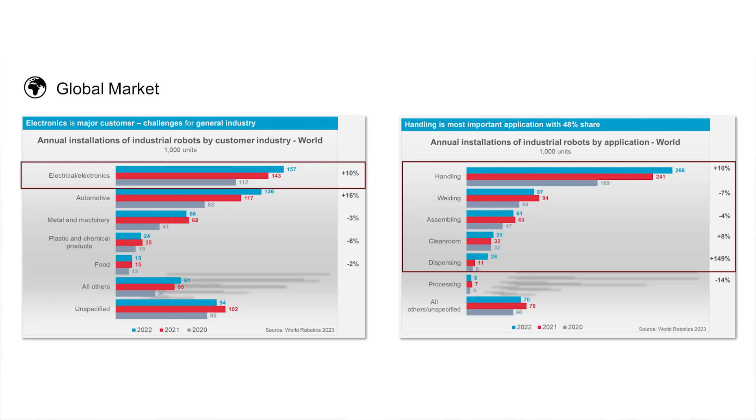Instead, in Europe, we have a very strong know-how, and often the production is related to custom electronic board or some special components. Let's say that for robotic is a very important market because according with our studies and the International Federation of Robotics, electronic market is one of the top two sectors for robot deployment alongside automotive market. This is very significant for Europe, as you said.

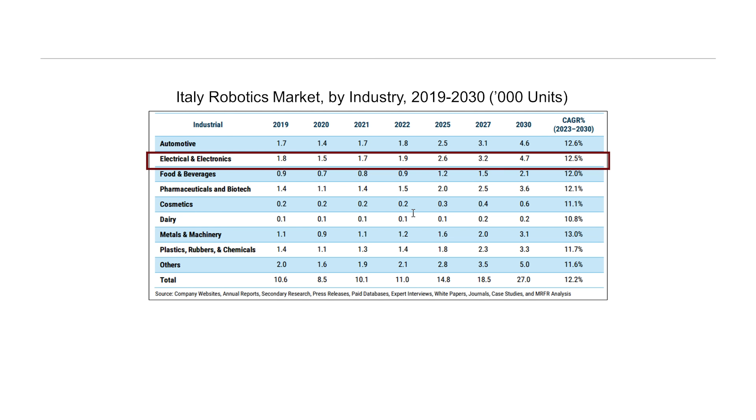So could you outline why these changes are happening right now? Yes, we can consider different factors, different drivers why this is happening. For sure, a COVID pandemic accelerated this process because it showed the vulnerability, the problems to have a distant supply chain, because a lot of electronic suppliers were located in Asia. So the shortage of semiconductor impacted all the rest of the world, bringing to a reevaluation of the supply chain strategy.

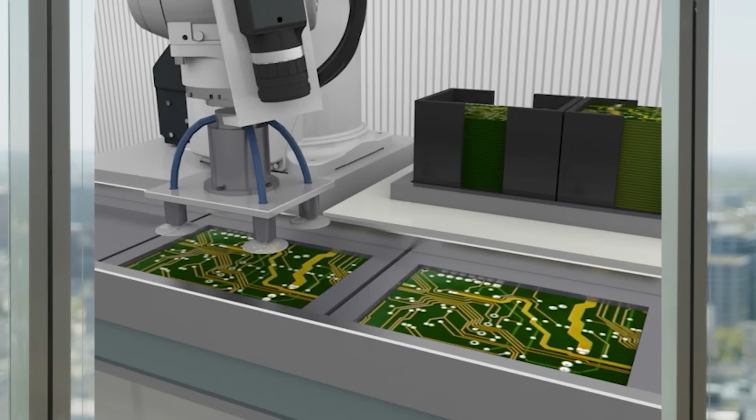But it's not the only driver, even because before we spoke about automotive market, and automotive is shifting to electric vehicles. So this will increase the demand for electronic boards and other circuits in general, semiconductor components for electronic market, for automotive market, sorry.

Sure. And another driver we can rank between these is the government fund. There were huge investments at European level, and the European Chips Act is a clear example. But also at the national level, we have different investments that can support companies to automatize their production and be more competitive worldwide.

So it sounds like this will translate into significant growth of this market in Europe. How do you see this? How do you expect the market to grow in the coming years?

In the coming years, let's say that I see different changes. Until now, automation was related mainly to big companies. Now we are observing that also small and medium enterprises are approaching robotics and automation. So I think that this change of paradigm will be very soon reality.

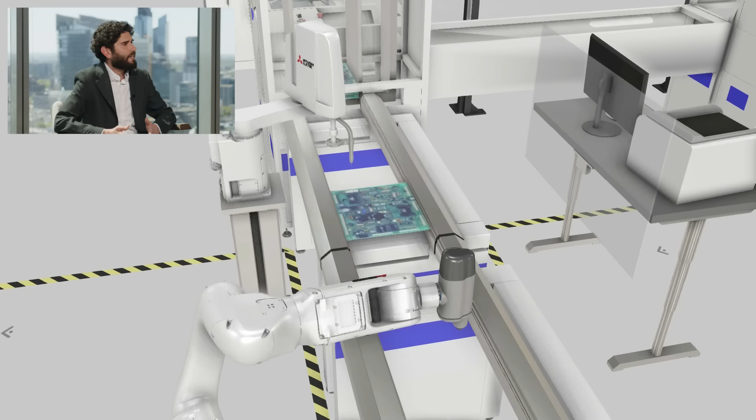We can say that the biggest challenge is for sure the shortage of skilled workers, even because in this period a lot of experienced workers are retiring and not enough young workers are entering the market. For example, soldering is a very critical application in electronics because this process needs a lot of experience and an extensive training.

So, companies in the electronic market right now are struggling with this. Another challenge they are facing is volume, because mass production is mainly related to Asia. In Europe we have production characterized by low volume and high product mix, which means companies need flexible solutions and equipment adaptable to different formats and changes. When we speak about small and medium-sized enterprises, they face budget problems because they don't have a huge budget to automate their production. Last but not least, there is also a lack of knowledge, because over the years all the knowledge was developed in Asia, and here our know-how is limited to some specific components. So for this reason, we try with small and medium enterprises to share the knowledge we developed in Japan and across Asia.

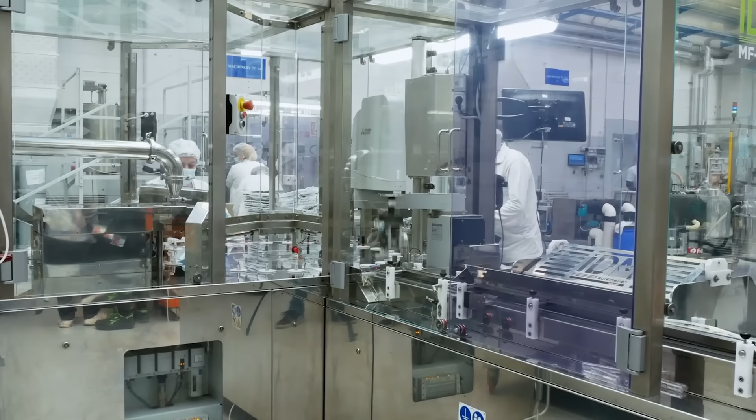So how do robotic solutions fit specifically into electronic market needs? In general, robotics brings speed, so faster cycles, brings precision, so repeatable activity, and flexibility. They bring flexibility to your equipment.

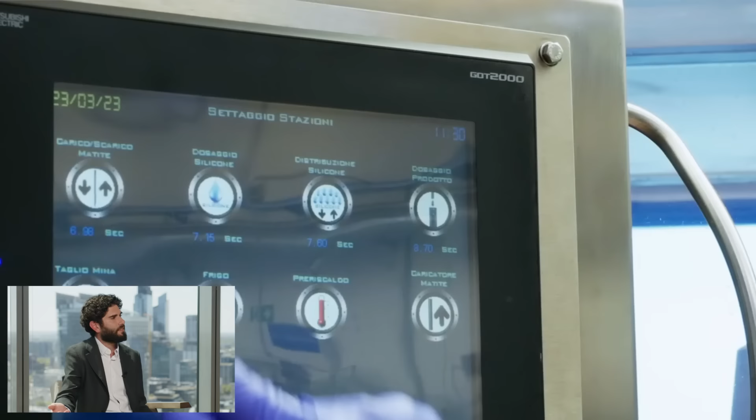Specifically for the electronic market, we need to start from the requirements, from the risk. One of the biggest risks in electronic activities is electrostatic discharge. This is the reason why we perform modifications of our standard robot to develop a tailored solution for the electronic market, with a certification called ESD. Our robots are ESD compliant, certified by an international certifying body called ESD Academy.

In comparison with our standard model, the ESD model has special paints to avoid any discharge, or rubber caps that eliminate completely the risk of electrostatic discharge, eliminating the risk of damaging the electronic board or semiconductor components.

In addition, a lot of activities in the electronic market are performed in controlled areas, because contamination from dust or other particles can damage the electronic board. For this reason, we certify our robot as standard with ISO class certification, given by Fraunhofer, another international certifying body. This allows our robot to work in controlled areas, as many activities occur for the electronic market.

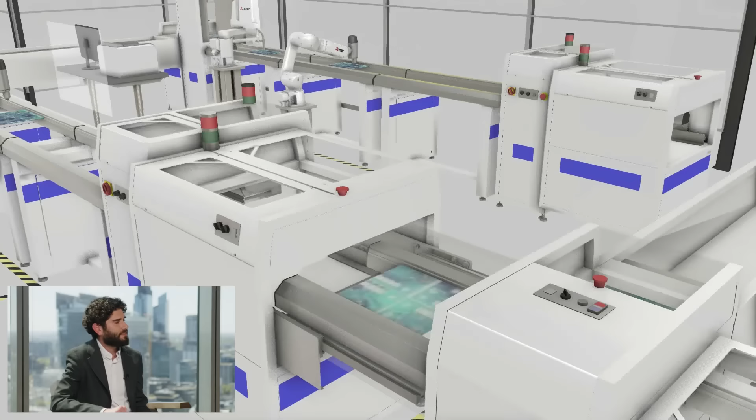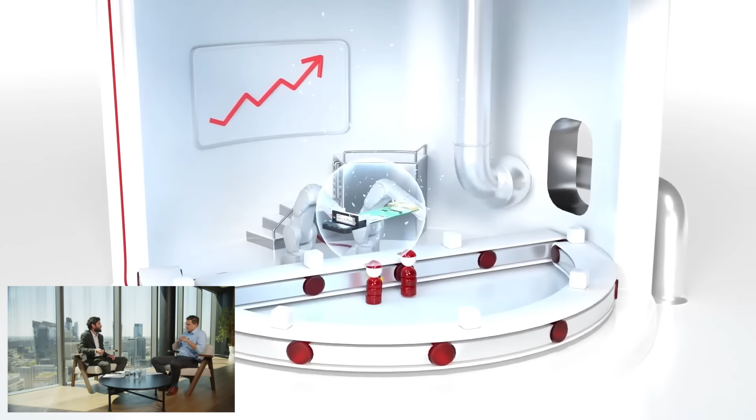Yes, you mention a key point for electronic activities, because precision is required for many processes in electronics. Our factory spent a lot of time studying this problem, and at the end they developed a dedicated function that increases the repeatability of our robots. You can easily enable this function by adding external hardware directly to the controller, and the robot will be more precise independently from temperature changes.

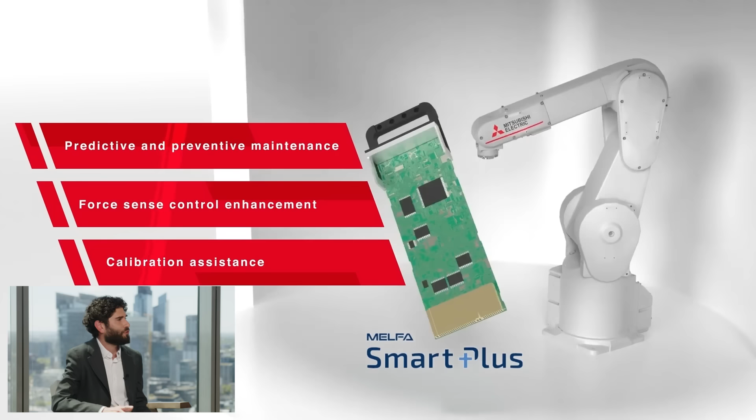In addition, all this production and precision data from testing - because precision is often used not only in assembly but also in quality checks to see the exact position - all this data is saved into our IQ platform, our automation platform, because we have a model fully integrated with our PLC. Thanks to this, we can collect all the data and share it with a dedicated protocol in the semiconductor market. This protocol is called SECS/GEM, and thanks to this complete ecosystem we can collect all the process data and share it with all the other systems.

It's important to note one point about how you actually assemble the product, but also how you report that precision further. So I think that's a good point.

So we have this picture now where the challenges in the manufacturing of electronics assembly are met with advanced robotic solutions. And I think it's worthwhile to also mention that the one thing is the precision of the robot arm, but the second one is this kind of intelligence-enabled precision given by these special features that you mentioned. So all of that, from the pure production perspective, sounds great.

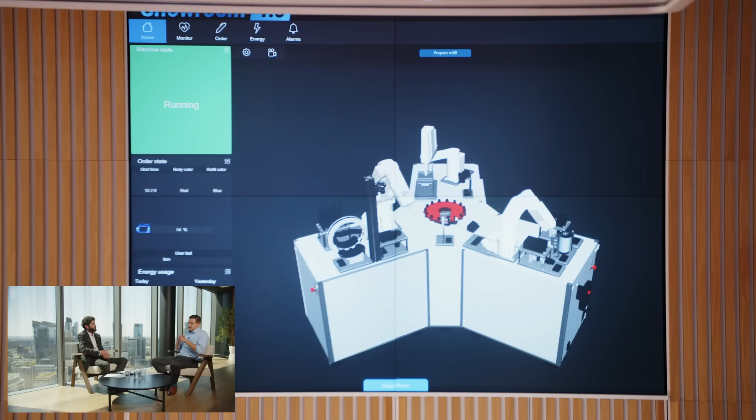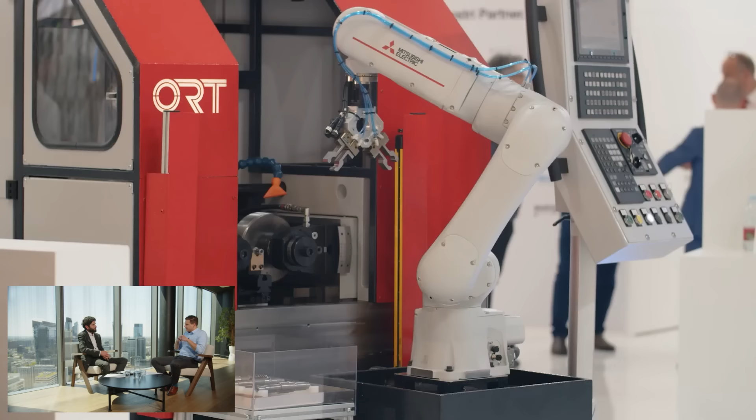However, what about the effort of implementation of robotics solutions? And I think this is when the software value comes to mind, right? So the problem that we still have in front of us is the implementation of the robotic solutions. There is a lot of discussion how, for example, digital twins are simplifying the approach to design and deployment of various applications. And I assume that also fits robotics. So how do you see digital twins helping manufacturing companies to use the robotic applications?

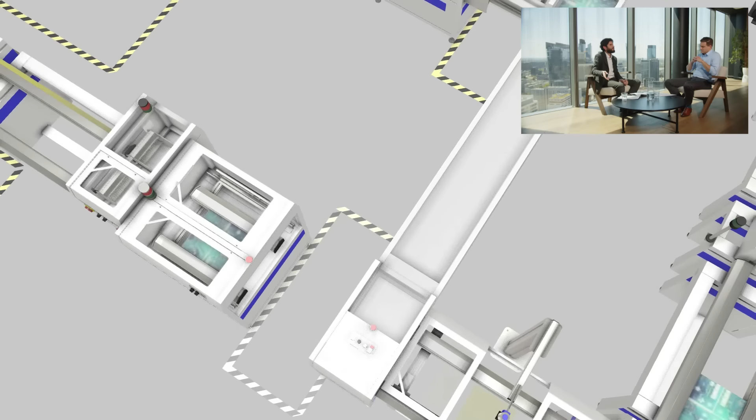Digital twin is strongly impacting robotics, it is a game changer, because digital twin allows us to design the machine, validate and program the machine before a single piece of hardware is mounted or constructed. So for all the companies that struggle with budget problems, that find it very difficult to integrate robotics in their manufacturing, we support them thanks to digital twin, and this creates a real bridge between the virtual dimension and the physical dimension. And this represents a booster for automation for all the companies that before were not so prone to approach automation.

Yes, because you can understand a lot about a specific application just by looking at the digital representation. I think that definitely changes the approach to planning and decision making for automation investments. Yeah, and for the company who wants to approach automation and robotics, it allows the company to see that their idea works in their production environment. So this makes the difference when someone looks virtually at exactly their production environment and their concept working on it. So this for sure is something that brings value.

Right. When we are talking about how this digital twin approach helps in creating those kinds of applications, maybe we should focus on specific types of applications. So I assume there are certain types of robotic applications that can be deployed in electronic manufacturing. So maybe you could outline what these typical types of applications are and how digital twin is supporting the creation of those.

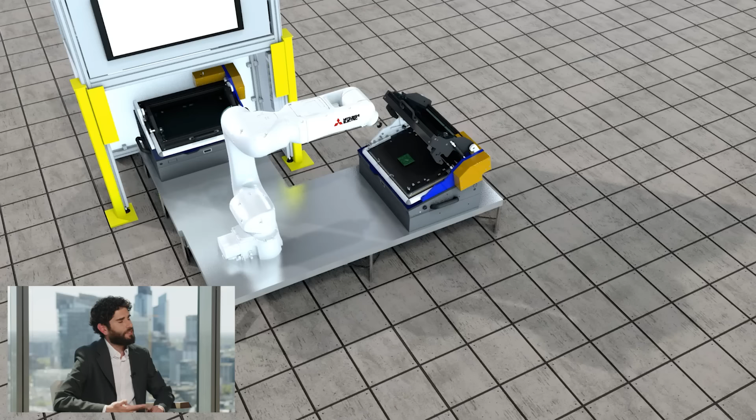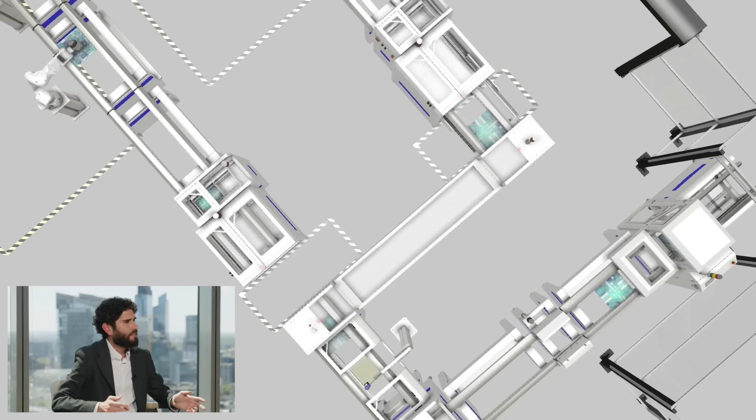Yes, of course. Three typical applications we see every day with our customers are, for sure, loading and unloading of the electronic board, so machine tending for electronic boards. And this typically happens with the test machine. Typically the robot loads the electronic board into the probes on the fixture machine and then unloads the electronic board when the test is completed. In this case Gemini was fundamental, because in the last project we made, one single robot was loading and unloading with two different test machines. So the calculation of the cycle time was very important to understand how the robot cycle can be developed. So in this case, the impact of the digital twin was fundamental.

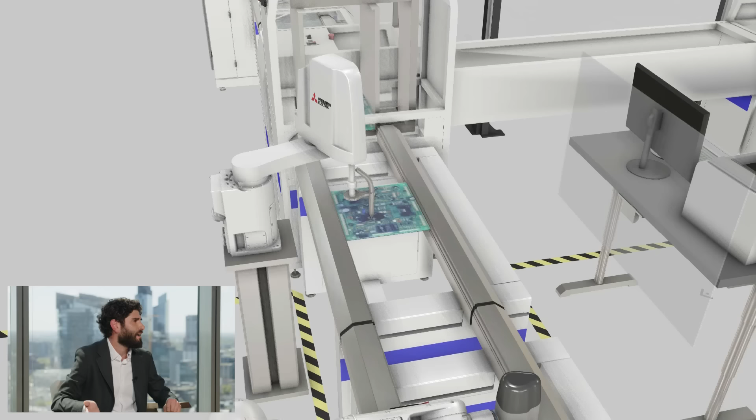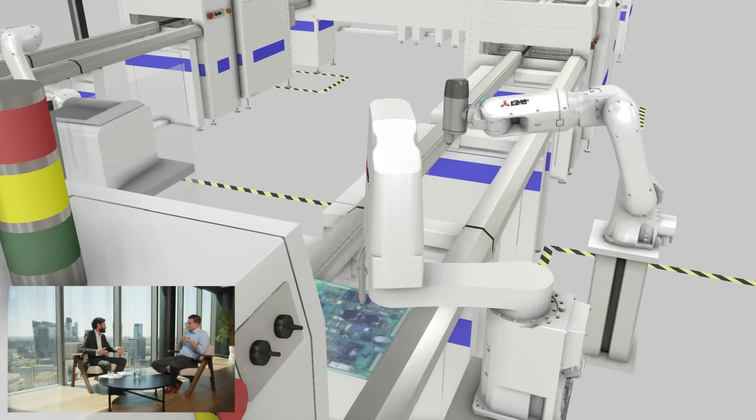Another application we already mentioned is soldering. In soldering, the difficulties can be related also to the path of the robot. In this case, the integration between our software for programming robots and the virtual commissioning software, Gemini, was very important, because thanks to functionalities of our robot programming software, we easily make a complex path and then replicate it, just because they are integrated. So what I program in RT Toolbox, we can visualize on Gemini. Okay. So the programming was very easy from a robotic point of view because we had a dedicated function, and then you can visualize the soldering activity on Gemini. Mm-hmm. And the last application that is very important is quality inspection.

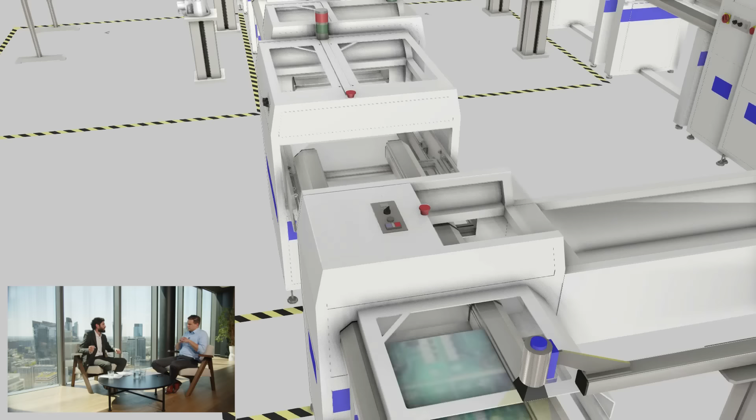And in this, typically the robot integrates a camera on the wrist, or the camera is positioned in a fixed position. So we can say that to define the best layout of the application, the key was Gemini, because we tried the two scenarios, with a fixed camera and with the camera integrated on the wrist of the robot, and we saw which was the more flexible solution to satisfy the needs of the customer.

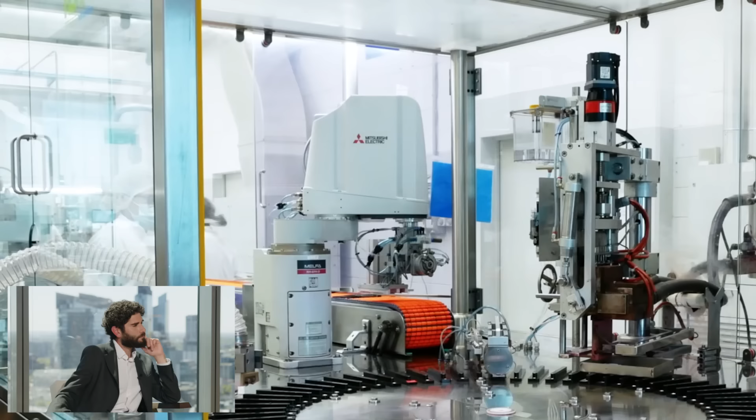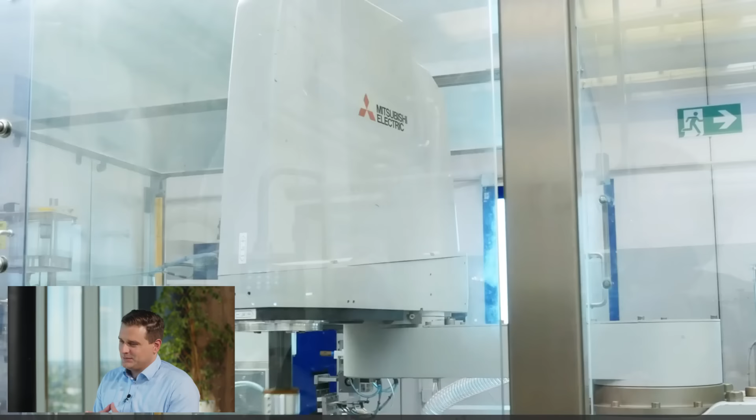Right. And I think it's a very interesting summary of those benefits based on specific examples, because there is a variety of problems to be solved with robotic applications, and I think that the key is to be able to do that by trial, but a trial that is cheap and doesn't cost mistakes and hardware investments and so on. So I think that for those processes in manufacturing, digital twin is crucial.

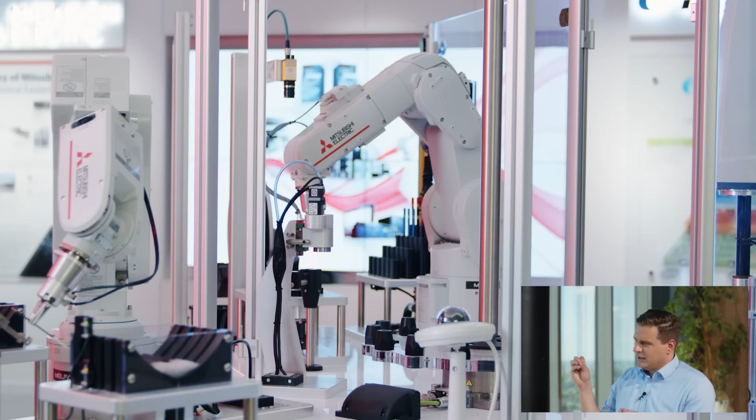I think we can also say that the benefits of digital twin don't end with, let's say, application development, right? So you mentioned how the program written for the robot can then be visualized in the digital twin in Gemini. But the same is true when you actually have the application already running, right? So with digital twin, you can monitor the actual production and also start thinking about improvements. So the digital twin probably gives you benefits through the whole life cycle of the application. Would you agree? Yes, totally.

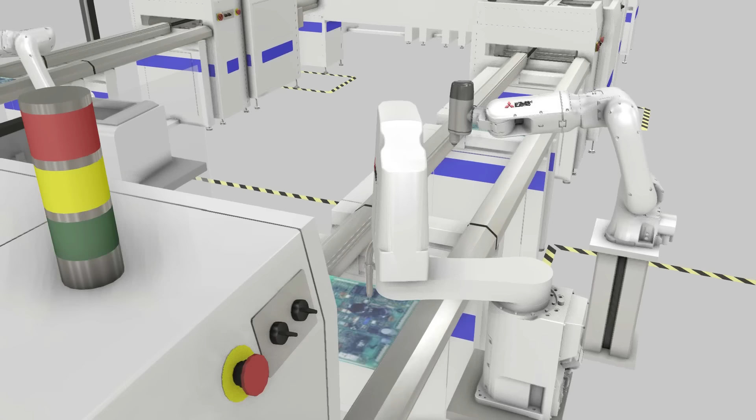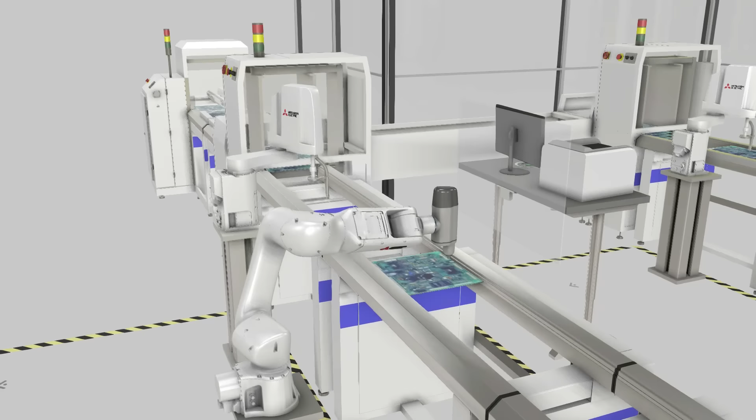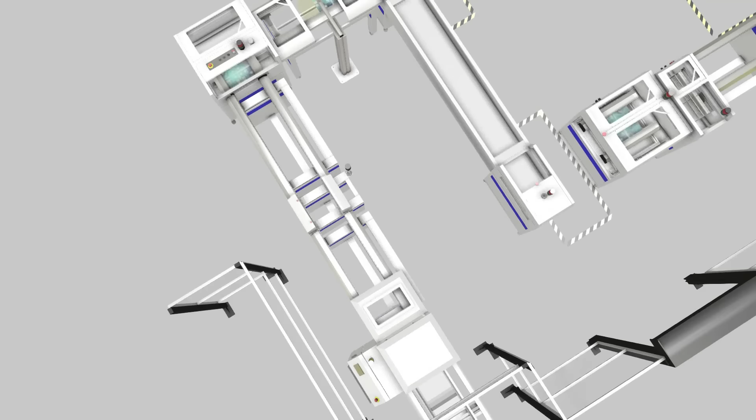I totally agree, because when you have a machine already running, you can import the CAD of the machine and all the parameters into the digital twin software, and then simulate all the different scenarios. So, for example, I change a parameter or add a robot or change the layout of the machine. That is everything that you can do. Evaluate this scenario and then see the impact in terms of takt time, in terms of productivity, in general of OEE. So it allows you to determine which is the best scenario to improve the productivity of your machine. So exactly.

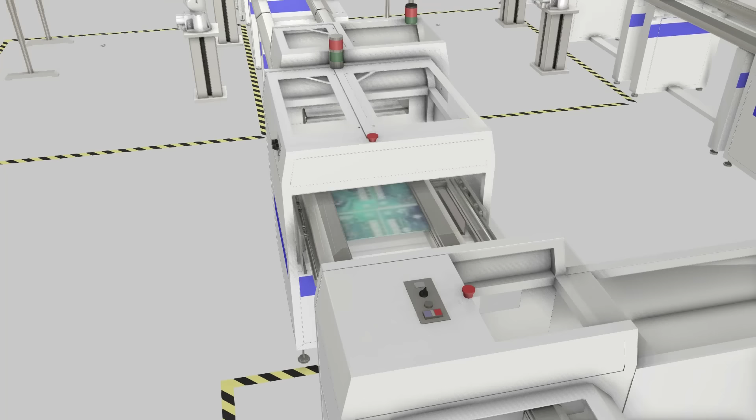Right. Yes, because I think once you make the investment in the software package, like we mentioned, then of course the value of that tool will be provided through time and through the actual process of manufacturing. And I think, with high mix, low volume production, those changes in the layout, some tweaks in how the robot works might be quite common. Yeah? Yes, it happens very often, also because custom boards, for example, are very common in Europe. So changeovers are very frequent, and different scenarios are always present.

Yes, right. Great. I think that this gives us a very good understanding not only of how to create this type of application in the electronics market, but it also presents the value of the software solution that I mentioned in the beginning. So robots themselves are very important to address the labor shortage, right? Due to their precision and all the certifications you mentioned, they are important for electronics assembly and other types of processes in the factory.

But what they can do is definitely augmented by the digital twin that you mentioned, because the digital twin reduces the costs of implementation, kind of secures the application from mistakes and so on. It allows for better monitoring, it allows for continuous improvement of the production line. So it shows that the robots and the software come together. And I think that could be a nice summary of our conversation. Simone, any final comments you would like to make today?